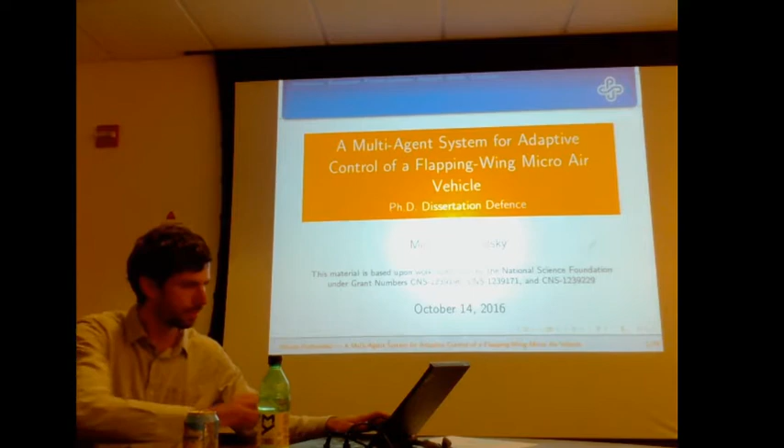Did you bring your papers? What papers? You said you published some papers, you didn't bring them? I can print them really quick. Yeah, you should do that, print a set. Might as well. Can you print the overheads as well? Don't you have a copy? No. You didn't print out copies of the overheads? I made two copies. Oh, there he is. Sorry about that.

I'm not as fast getting across campus as I used to be.

Okay, let me email it back. Is this the latest? No, it's an earlier edition from six months ago. I don't know if it's the same as before. This is the older version. Okay, this is for you. Thank you, I had two copies of the thesis. So let me print some more. Do you want a copy of these? Is there an extra copy? I don't need it if it's the only copy, I can just follow along. Okay, I'll make notes on the document.

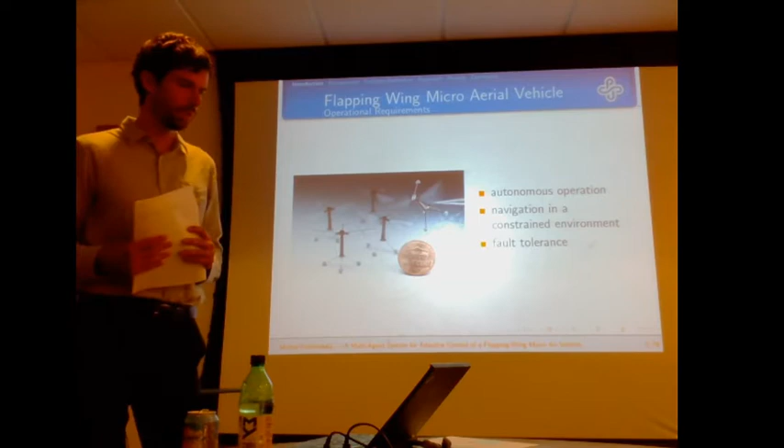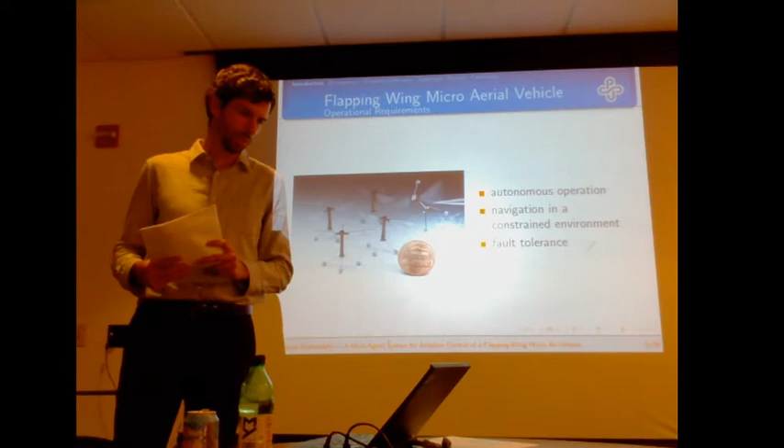If we want to apply these kinds of small robots in practice, there are some requirements. First, we want autonomous operation, meaning there's no pilot behind each robot, because that would be infeasible if you start swarming or have some kind of massive application where you want these robots to work functionally by themselves. Another property is navigation in constrained environments, because we want them to operate indoors in some kind of cluttered environment. So this is an important feature.

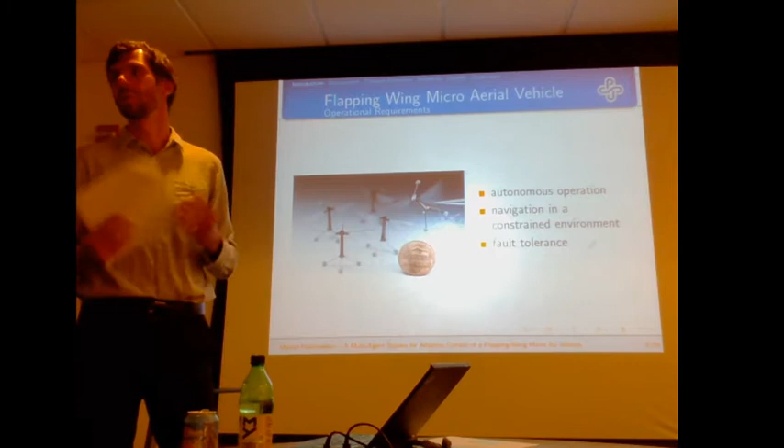We also require fault tolerance, because in case there's damage to a wing or some other problem, we need this vehicle to be able to recover and continue its mission.

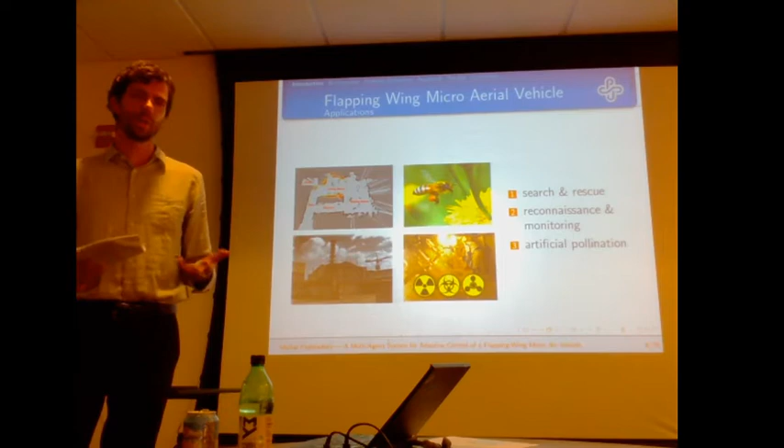So what are the applications? First of all, search and rescue in case of some kind of environmental disaster. First responders arrive to the facility, like a chemical plant, and they want to send these vehicles inside a building to see the status of the building. Is it stable? Is it safe to go in? Are there any toxic materials present? All of this can happen automatically without anybody stepping in and being potentially in a dangerous situation.

Another situation is firemen, similar story. If you have a building on fire, you can send these robots in and assess what's going on inside without putting people at risk. Another big area is reconnaissance and monitoring.

First, in a military situation, you want to see with this robot what's going on around you, where the enemy is, what kind of situation is going on there. Then for monitoring, that's typically for law enforcement. You want to see behind the door what the suspect is doing, and so on.

Those two are fairly not surprising, but the last one I want to mention is artificial pollination. The idea here is, if for some reason we're in a situation where we need more pollinators for our crops, and there's no bees or other ways to do that, we could use these tiny robots potentially to pollinate the plants.

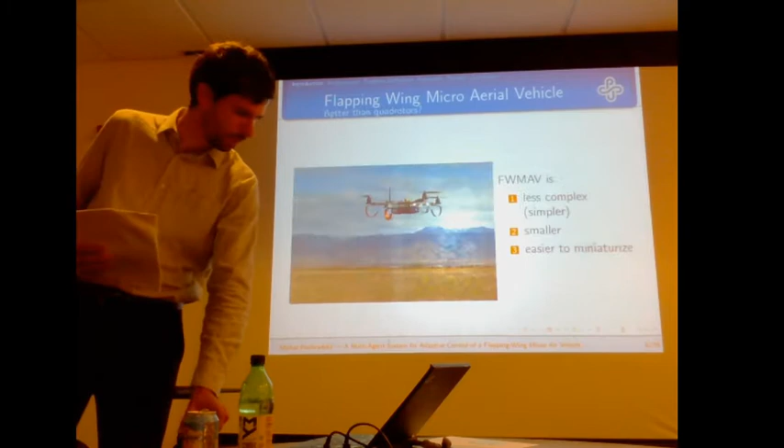You might ask why we don't just use quadcopters or some other drone for the same thing. The problem is you can only go so small with quadcopter technology, because you need motors and propellers, and that stuff just doesn't scale well after a certain point. The aerodynamics doesn't work the same way, and the motors cannot be much smaller than they are. So if you want to go truly insect size and operate on that small scale, you have to use flapping wing vehicles. There's really no way to make a quadcopter that small.

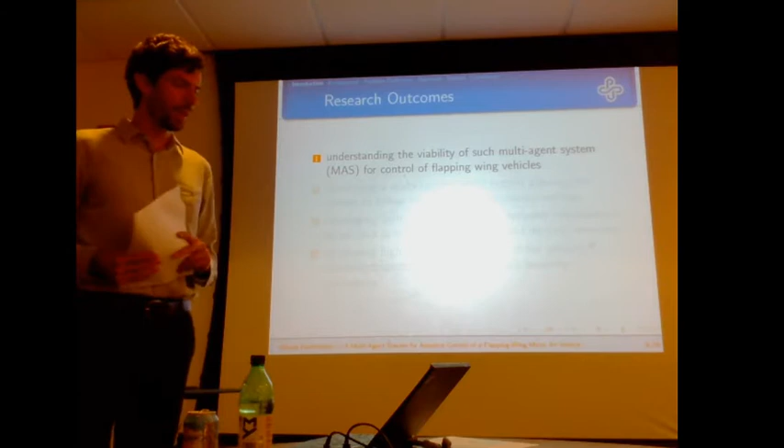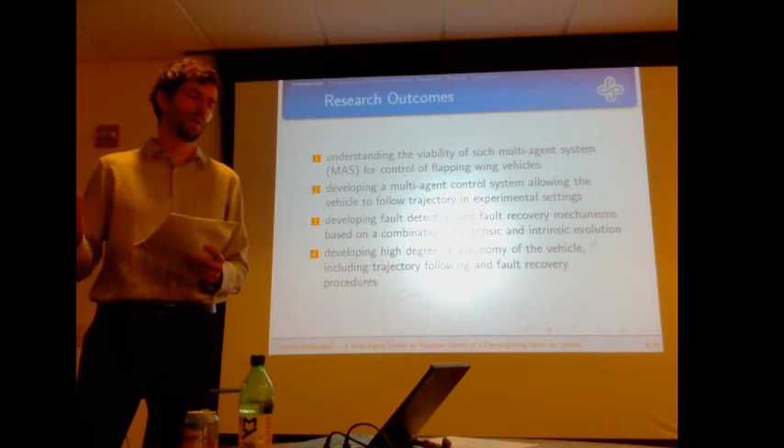I would like to briefly mention the expected research outcomes. First, we need to understand if a multi-agent system is a good option for the control of such a vehicle. Then we need to develop this multi-agent system, and because we want the vehicle to be autonomous, we want it to be able to follow a trajectory we specify. Then we develop a fault detection and fault recovery mechanism, adding this property of fault tolerance. The overarching goal is to develop a vehicle that is autonomous, can follow the trajectory, and can recover from a fault.

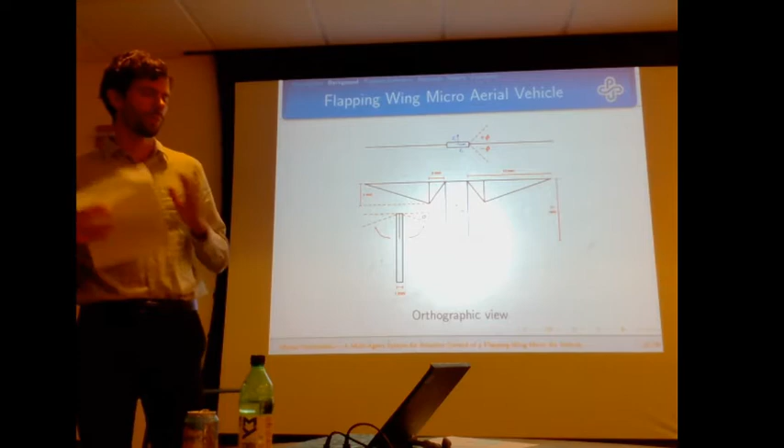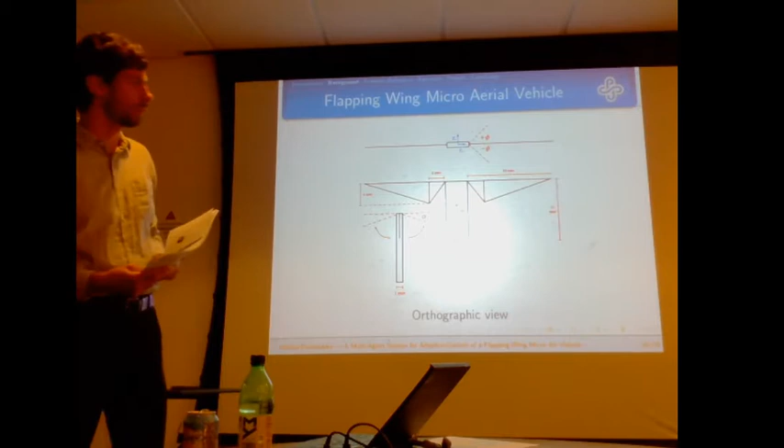Now some background information. Some of it may be familiar to you, some may be new, so I'll go through it briefly. This is a model of the vehicle. You can see we have two wings. They can move a certain angle back and forth, and they have some angle of attack alpha. Basically they're like on a hinge, and the wing is loosely on the hinge, moving forward until it stops at the angle alpha, then it moves backwards and stops the same way, just in the opposite direction. So this is like a conceptual vehicle.

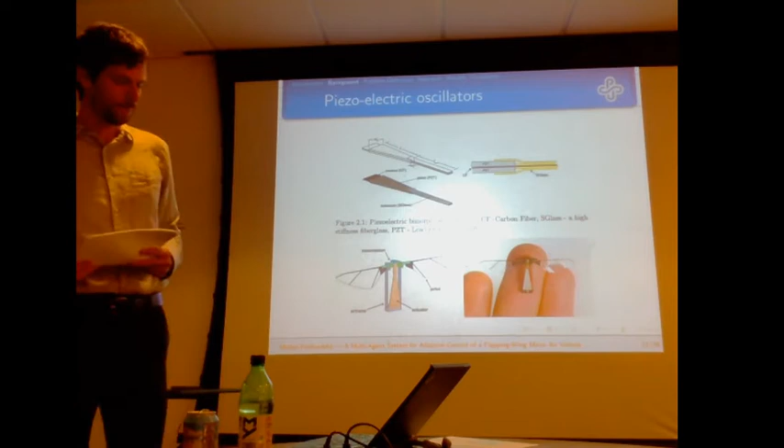Now I have to talk a little bit about what kind of actuators I can use for such a robot. The first one is called a piezoelectric oscillator. It's basically two slices of piezoelectric material, and when I apply voltage across them, it will bend either one way or the other depending on positive or negative voltage. In this picture, here we have the vehicle, this is the actuator, and it's extended and connected to a transmission that then translates the bending movement to flapping of the wings. You can see that it can be achieved to be truly insect size.

Can I ask you, where do you apply the voltage in that device? So you see tiny wires here, and basically there are two layers of this piezoelectric material, so you apply, let's say, positive here, negative here, or the other way around, just down the bottom of that structure. Oh yeah, I think this is where you apply it, this is like where it connects to.

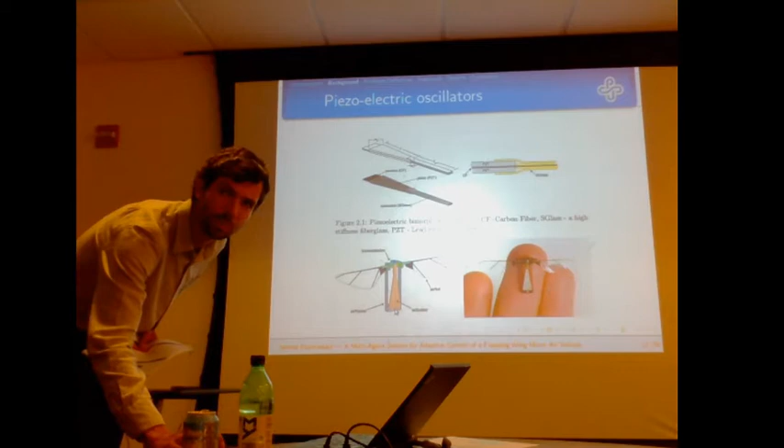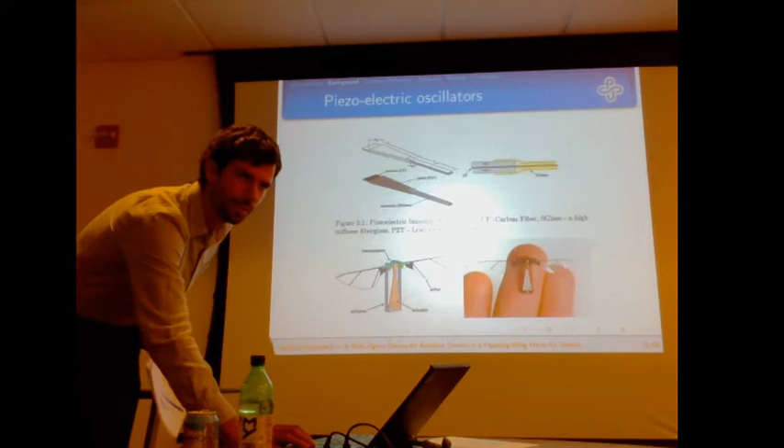What kind of battery for this? So right now this vehicle is externally powered, and I'll get in a second to why.

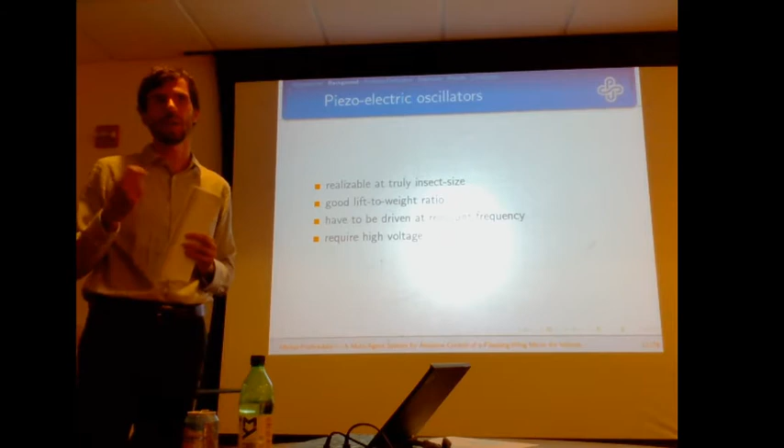The reason is you need relatively high voltage, at least 150 volts. So right now it's only externally powered, but it has a good lift to weight ratio, so you can actually achieve free flight, and it allows you to go really insect sized. The problem, besides the power requirements, is that it has to be driven at resonant frequency because of the inertia of the wings. So in short, if you want this to truly work and provide sufficient lift, you're constrained to a specific frequency, so as a designer you don't have much play in this sense.

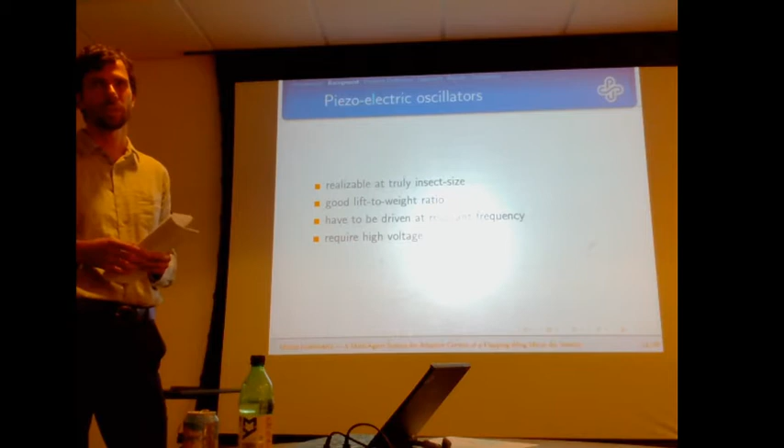Another disadvantage is that these oscillators are only available if you're at Harvard Microrobotics Lab. If you're not, then it's really hard to get these. So it's basically an AC waveform.

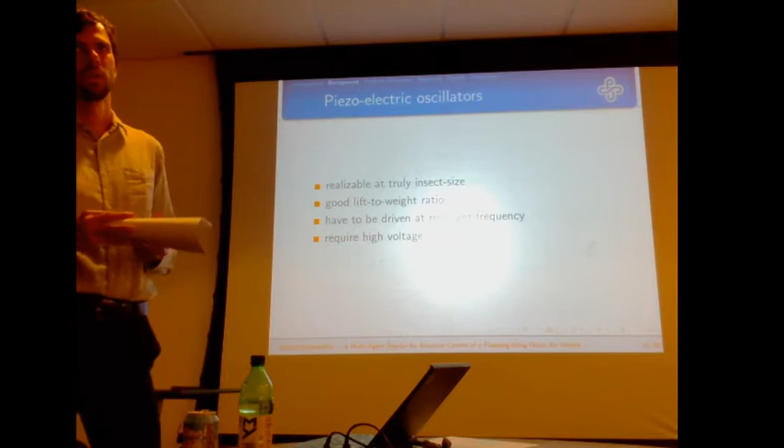Is it sinusoidal? Yes, it's a sinusoid, purely sinusoidal. And is the model of this device basically a capacitor? Because there's really only an AC current flowing through it. Honestly, I'm not sure, I don't think you necessarily need a model like that. Well, it must act as one of these basic elements - sure, yeah, I guess capacitor would be reasonable.

Yeah, and you can feed it with a sinusoid, and then you can do phase shift or offset the voltage to get it to do different things.

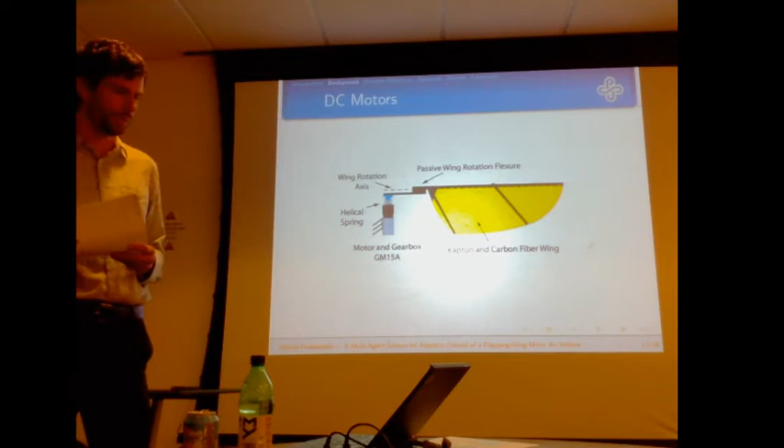So if you happen to not be at MIT, you essentially have to use DC motors for these vehicles. The typical scheme here is we have a motor with a gearbox with planetary gears to provide sufficient reduction, so we have enough torque at the output shaft. Then we have some kind of transmission or linkage going from the output of the motor to the wings, to translate the rotational motion into flapping motion.

And the wings themselves are made from carbon fiber spars, and then we have some kind of either Kapton or a different thin plastic foil as the main part of the wing.

Here you can see this is a robot. Here are the motors, and again there's a transmission on top of it, and then here's the shaft, connected with linkages to the wing. So as the motor rotates, it makes the wing move back and forth.

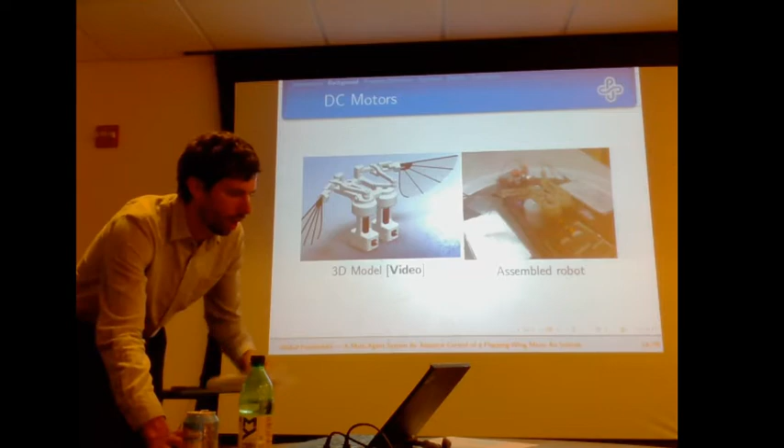And I have a video to show this, so let's see how this will go. Yes, so this is when it's operating, this is basically when the robot is in action. And then the assembled robot is here.

So DC motors are comparatively affordable and easy to use. They don't produce as much lift, so you're restricted in how small and how light you can go. But the majority of the vehicles currently available, or currently developed, use DC motors.

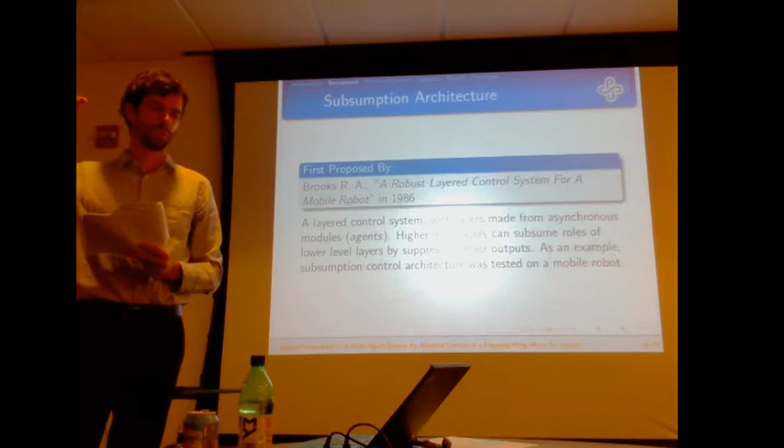So then subsumption architecture - it's an important part of our solution. Just briefly, it's a concept widely used in robotics, where you can decompose the behavior into several layers with different priorities. Every higher layer has a higher priority, and if it needs to, it can take over the lower layers.

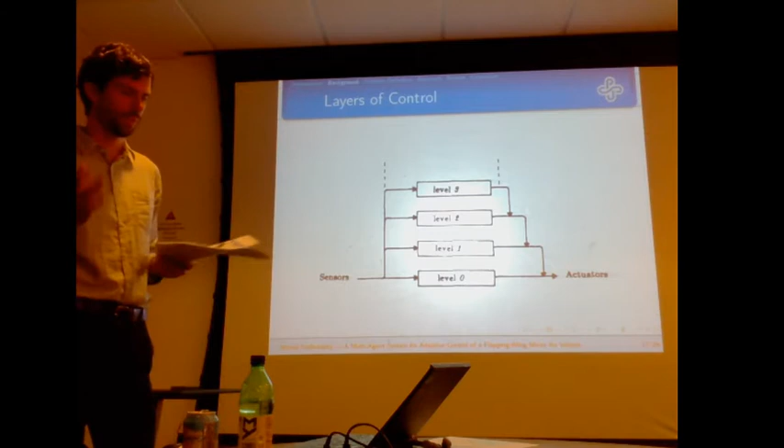So as a short example, here I have inputs from the sensors, then different levels of behaviors, and then actuators. Level 0 is, for example for a ground robot, level 0 will be just 'go straight' - a simple behavior, if nothing else just go straight. Then I have level 1 behavior, which says if you find an obstacle, turn right to avoid it, because I don't want the robot to hit the wall.

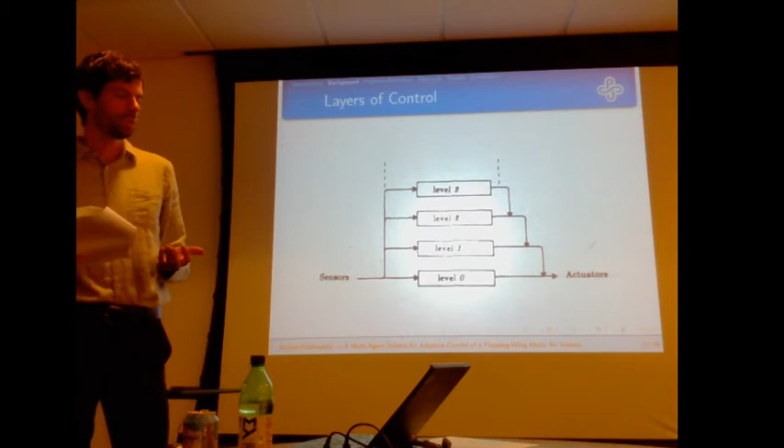And then I have level 2, which is if low voltage on the battery, stop. So basically the robot will go straight until it gets close to the wall, and it will turn right, and continue doing so until it runs low on battery. The idea is that you can compose relatively sophisticated behavior with these very simple components, because you can easily extend it to, for example, 'if something happens, return to the base', or 'if you identify some kind of target, do something'. So it allows you to easily build up complex behavior.

As an example, it was used in the Roomba robot, which is based on subsumption architecture. They also used subsumption architecture on a Mars rover to a certain extent. So it's a fairly common theme.

Then just briefly about evolutionary algorithms, again inspired by nature. In short, what I'm trying to do is have some population of individuals, and each of them represents some solution.

I assign them fitness based on some function, and then I let them compete with each other and produce offspring, and only the most fit will propagate in time, and then hopefully I'm getting the fittest at the end. So I might not get the optimal solution, but I get some reasonably good solution.

So far everything clear? You missed the definition for extrinsic and intrinsic. Okay, so extrinsic means that in case of a robot, the extrinsic evolution runs on some kind of model. I define a model, and then I run the evolutionary algorithm, but the fitness is assigned based on this model.

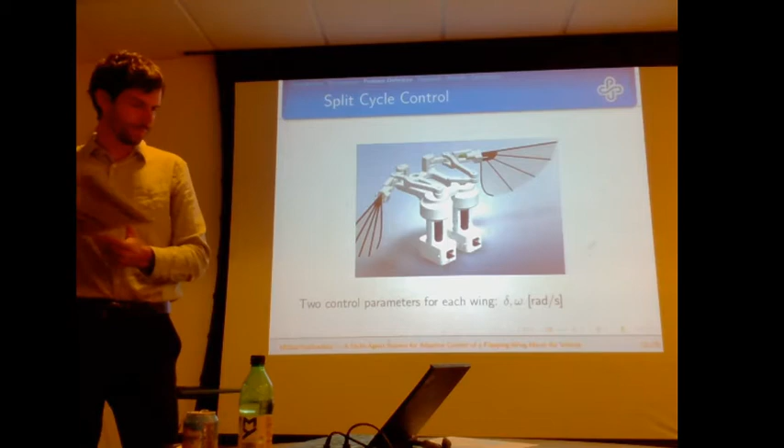But if you happen to go fast and then slow on the downstroke, you generate more force in one direction than the other, and it creates momentum that turns the vehicle around. That's a simple idea.

So then what I can do is, this is just a formal definition of the same, because I describe my wing motion as a cosine function, and delta is just a frequency shift, essentially a phase shift. So I'm moving it a little bit before or after the actual symmetrical movement.

I will use this concept for controlling the vehicle, because if I want to turn around, I have to do upstroke faster than downstroke, and then vice versa for turning the other direction. I'll get to that more later.

Now I want to show the experimental setup a little bit. For our experiments, we locked the vehicle to 3 degrees of freedom, which means we put it on a 2-dimensional surface, on a water surface, and then the vehicle can rotate around its own axis.

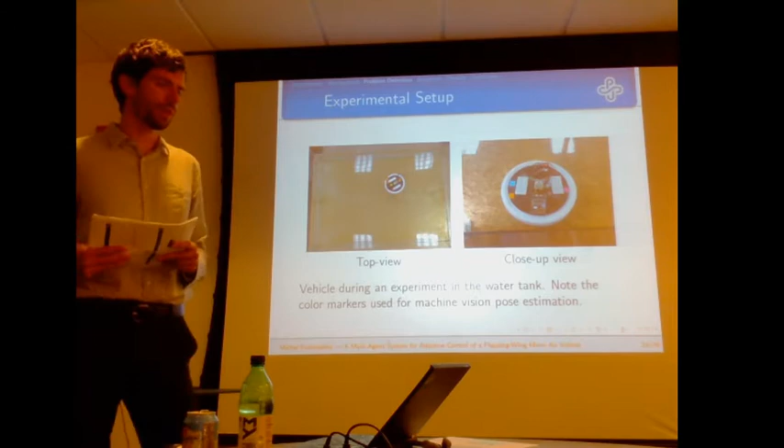The reason for this is twofold. First is to have a proof of concept that our solution works, that the algorithm works, and that the multi-agent system can perform well. The second is the limitation of the hardware, that currently the hardware doesn't produce enough lift to actually take off. So we were locked to this 3 degrees of freedom test plan.

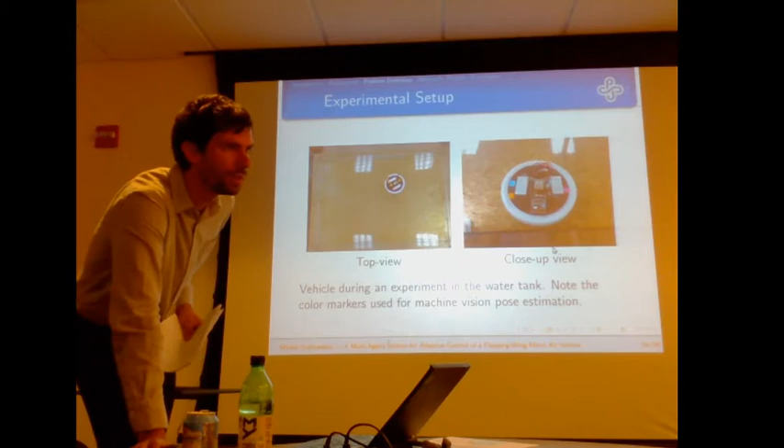Just as a comment, that water tank in the NEAR lab, which is used to do underwater sound testing, you have to have a large water tank, and that's where we got that water tank from.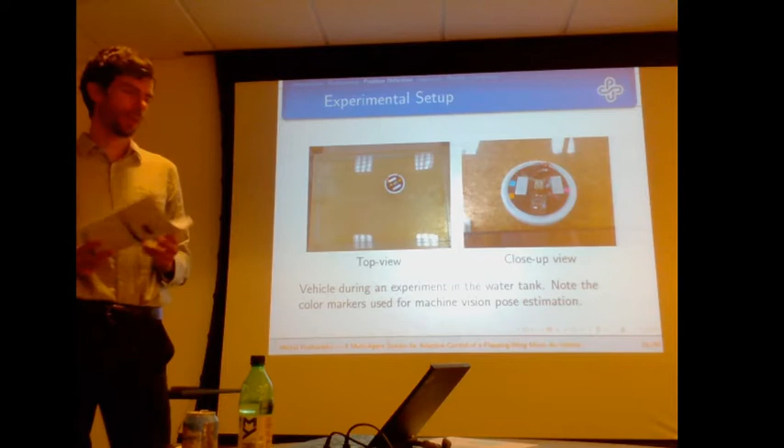So the thing is, it's about half the size of this table, so it's a fairly good size water tank, and we would just fill it up and let it float on the surface of the water. They were nice enough to let us use it, so that was good.

We put a camera on top, which you can see here on the left top view. How far was the camera? Around—it was actually on the ceiling, so 1.5 meters from the top.

Imagine this is the water, so then it was on the ceiling. How big were the color markers? Like 1 centimeter, like this, or like this. So then we had 3 markers, so you can determine the position and orientation of the robot. And you can see on the right, this is a close-up view.

And I happen to have a video that should present better the experimental setup, so let's see. And you will tell us what software you use to find the color markers? Yeah, I'm using OpenCV.

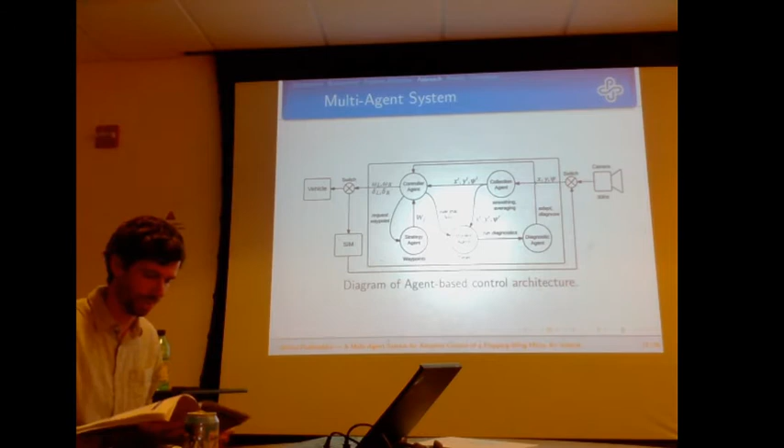So here you can see we have the camera that's above the water tank. And the camera provides, after we parse the images, XY coordinates and orientation. I would just refer to it as a pose, because position and orientation make up the pose of the robot.

Then we have a collection agent, and the collection agent basically filters the output from the camera, does some averaging and smoothing, and then sends the pose estimate to the controller agent.

The controller agent has the subsumption architecture in it and determines what kind of control inputs, delta and omega, it sends to the vehicle. The control agent also checks if it arrived at a waypoint yet, and if it did, it requests a new waypoint from the strategy agent that provides the new waypoint to go to.

Then I have a monitor agent that monitors the behavior of the vehicle, and if there's a suspicion of poor performance, it requests the diagnostic agent to run diagnostics.

So this is everything on your laptop, right? And then the laptop sends some signals to your vehicle, right? Yeah, but without loss of generalization, you can run the same code on the computer or on the actual robot. Can you? Yes, it's not computationally intense. But vision must be on your laptop. Yes, vision is on the laptop. Okay, and the motivation is that in the future I would have some other sensors on the robot that can determine the position and orientation, but I probably wouldn't use the camera in that case.

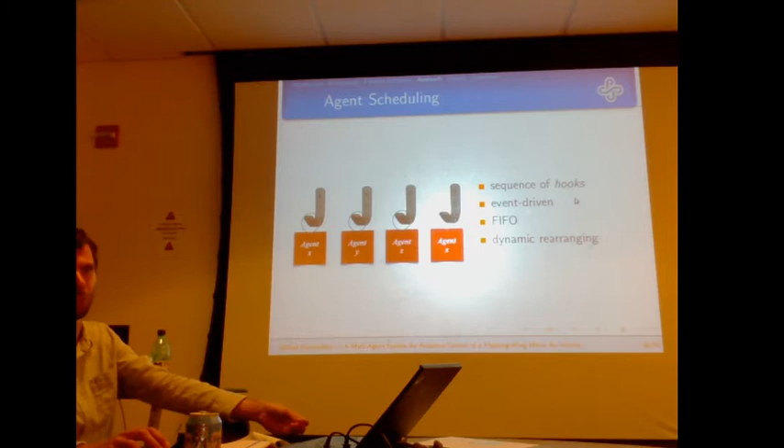And then the diagnostic agent runs the diagnostics and determines if a fault happened, and if it did, it takes certain actions. So now, just briefly about scheduling, the whole system is event-driven, so I don't have a set timer or frequency for running these agents. It's purely based on the events that happen. An event can be a new pose estimate becoming available, or the robot achieving a waypoint. And then I can dynamically rearrange the agents and step them in a sequence.

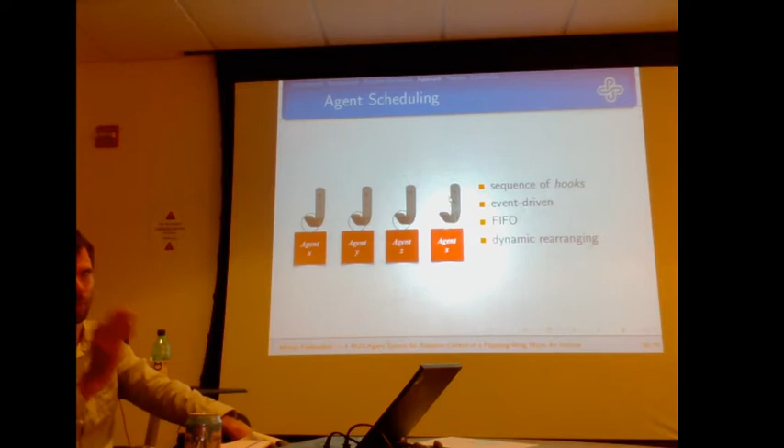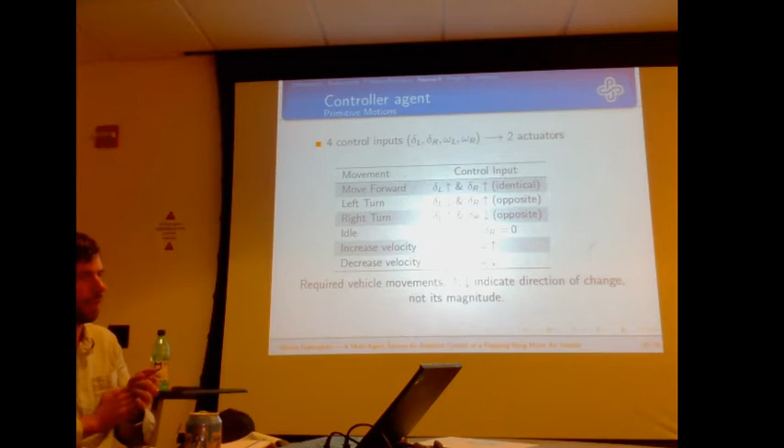So the control agent, we have 2 actuators and 4 control inputs. Because we have 2 actuators and 3 degrees of freedom, it's an under-actuated vehicle, which makes it a more complicated control problem. Hence I have delta and omega for each of the wings. I have these 4 primitive motions I can achieve with this vehicle: moving forward, turning left, turning right, and doing nothing.

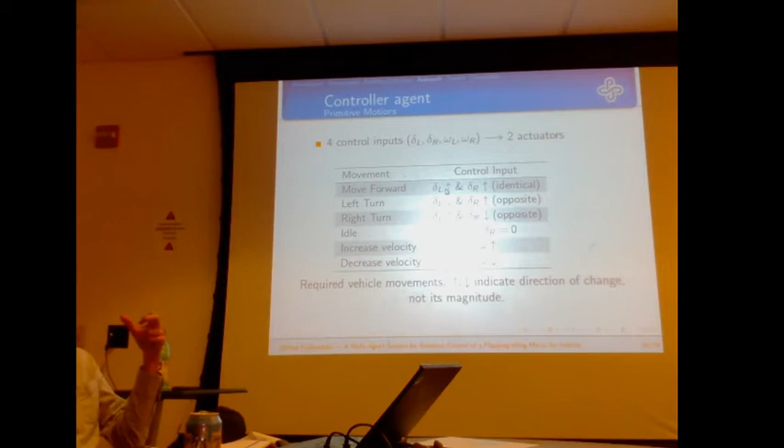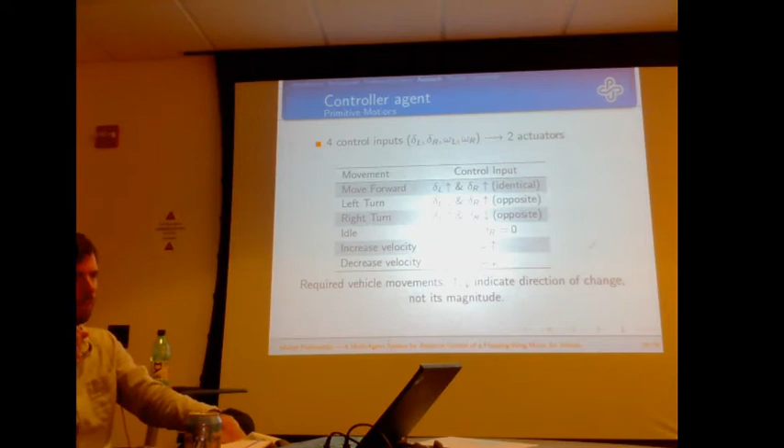If I want to move forward, I have to have the symmetric delta shift in both wings. I produce the force in the same direction, and I just go forward. If I want to turn, I have to do it in the opposite way, so it turns around its own axis. At this point, I know the direction, but I don't know the exact value of the delta or the omega, because that depends on the individual robot and can vary between them. So I will need some kind of learning algorithm to determine these numbers. Also, the faster frequency means I'm performing the move faster, generating more force, but the wing beating frequency itself doesn't change the direction.

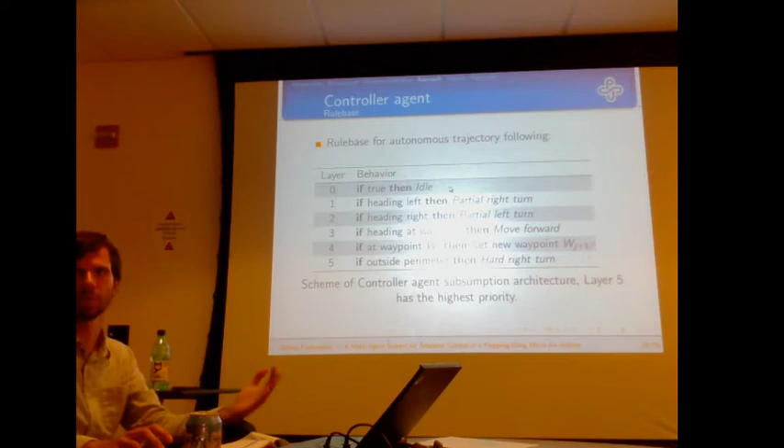This is the rule base for the subsumption architecture. Basically, the higher number the layer has, the higher priority it has. So in this simple case, if true, then idle, just do nothing. But then I have this set of rules: if heading left from my desired direction, you want to turn right. If you're heading too much right, you want to turn left. And if you're heading straight at a waypoint, then move forward to get closer to the waypoint.

And who gives waypoints? They are on a pre-computed list. The strategy agent has a list of waypoints fixed at compilation time, so it's not adapted. Then if I reach a waypoint, I want to get a new waypoint. And if I'm outside a certain perimeter, I want to turn right to avoid going even further.

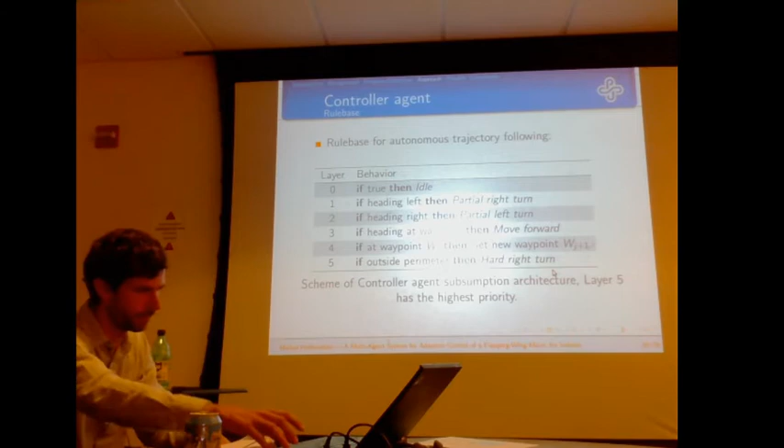Can I ask, on the controller agent, is it a straightforward generalization to 6 degrees of freedom? Here you're just doing 3 degrees. Oh yeah, so this is for the 3 degrees of freedom case. Is it pretty easy to generalize to 6? Yeah, I have a point about it later, that it can be generalized.

So the monitor agent monitors the performance of the vehicle, and basically the idea here is I have some expected behavior. Let's say I know if you turn, it should take a certain time, and if it doesn't, or if it takes longer than expected, then you should start diagnostics.

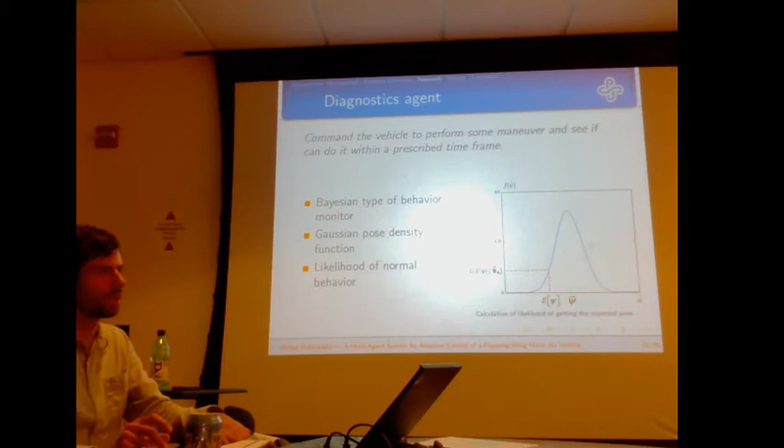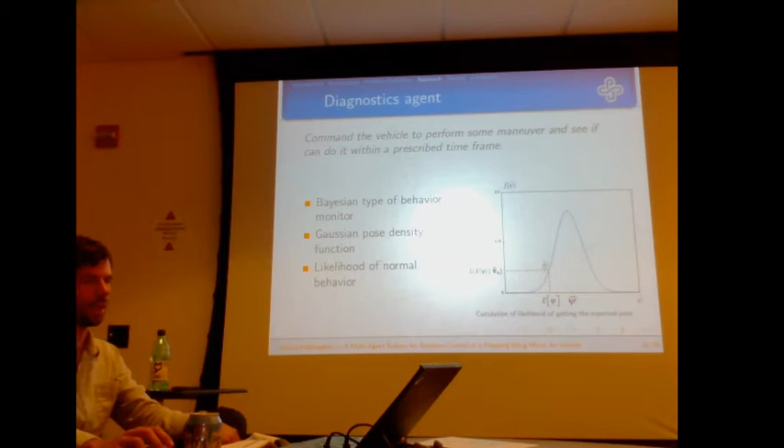This is applied for the diagnostics agent, where, as I said, I know if I tell the vehicle to do a certain maneuver, let's say turn around, I know how much this normally takes, and if it takes significantly longer, or takes significantly shorter, then I know that something's wrong and I have to take action. The idea is I have a normal distribution of times it takes to perform the maneuver, and I accept a range of about one standard deviation on each side. If I'm past that point, I can tell that most likely I'm not in a good operating condition. There's some fault, and this will get more clear with actual numbers. I will revisit the idea later with actual measurements, so it makes more sense.

As I mentioned, because we don't know a priori what control parameters we need to use, I need some kind of initial learning. That's where I use evolution algorithms to learn for each vehicle, because each robot is different due to manufacturing differences, nonlinearities, and so on. So before I can go and fly, I need to know these control values. Then in flight, if a fault happens, I want to be able to update these control values to restore certain functionality. So you're using evolution strategy, right? You're not using crossover? I'm using evolution strategy, yeah.

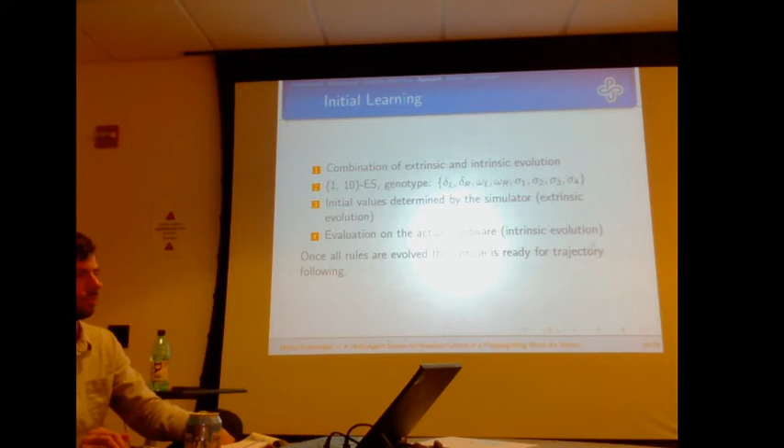So for the initial learning, I'm using extrinsic and intrinsic evolution — I'll explain it later — and I'm using evolution strategy. For the initial values, I use extrinsic evolution to evaluate that my algorithm works, and then I use intrinsic evolution on the actual hardware to get the numbers specific for the given robot. Once all these numbers are evolved, I can start with the trajectory following.

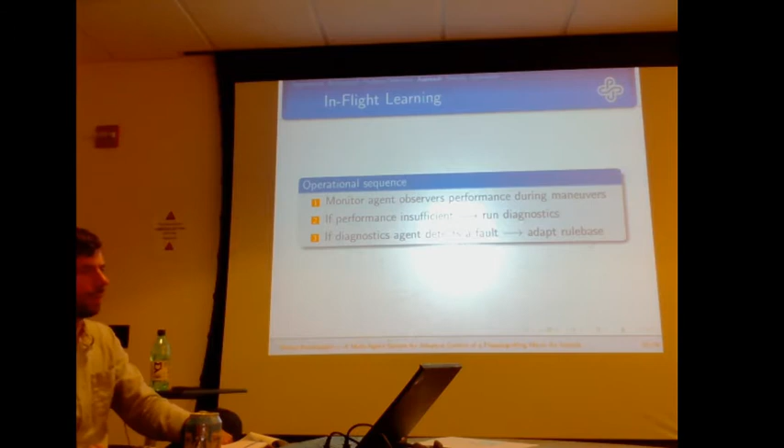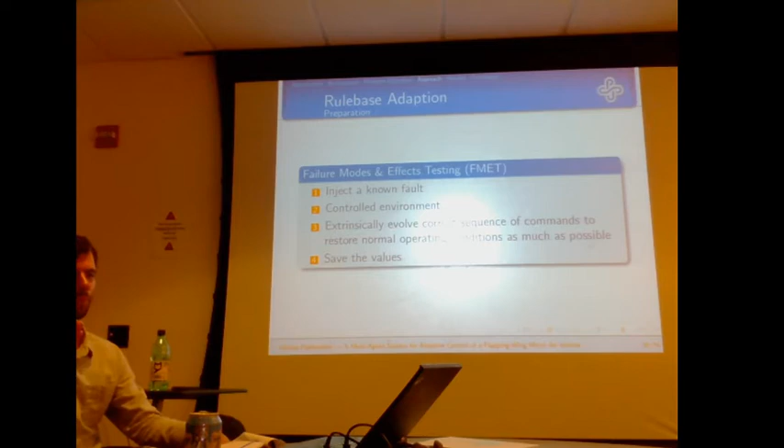So again, this is for the in-flight learning. If I do a specific movement and the performance is not sufficient, I run the diagnostics, and if I see that my likelihood function triggers a fault, I will need to adapt the rule base. The way this works, I know in advance what kind of faults I can recover from. Let's say if my battery is dead, there's not much I can do.

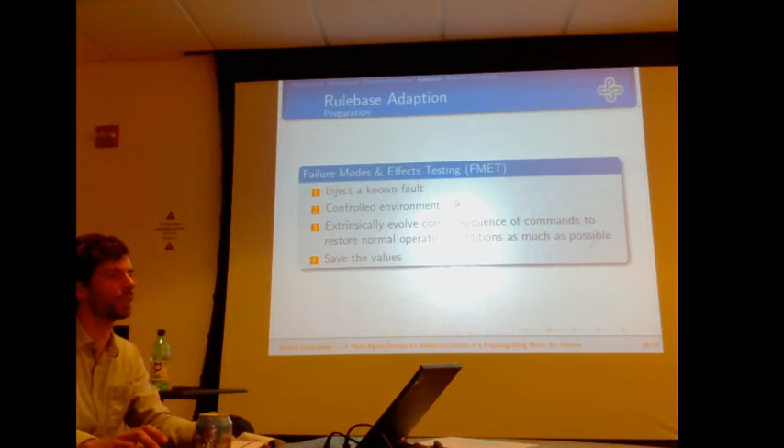But if I have, for example, a damaged wing, then I can recover from that up to a point. So you have fixed rules that I know how to adapt based on the kind of faults I can recover from. And the assumption is I have only one fault happening at a time. First, I need to inject this fault I'm trying to recover from. I do it in an experiment in a controlled environment, and then I measure the response, and then I evolve the new control parameters so I can restore the performance.

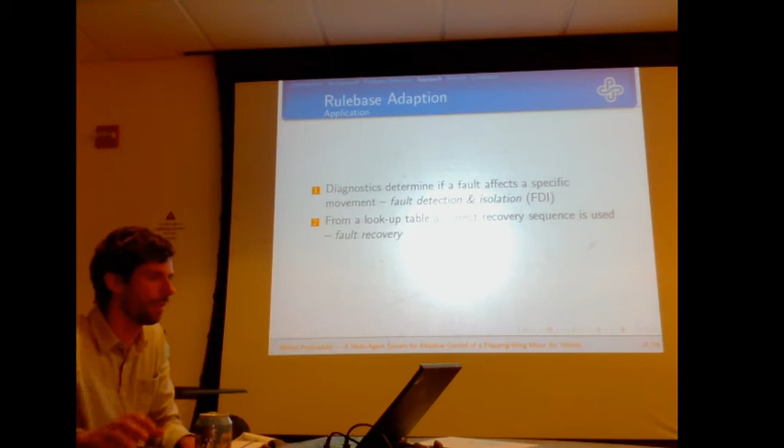Again, this will become more clear with an actual example. And this is just once over the same - if I have a specific fault that happened, I can adapt the rule base and then recover from the fault. So now the results. I will go over initial learning, waypoint following, fault detection and recovery, and obstacle avoidance.

So for the initial learning, I needed to verify that the evolution strategy is a good choice for the learning algorithm. And because I had access to a simulator developed by a third party, but the simulator was for a different vehicle than ours, the values that we would learn from the simulator were not very applicable for our case.

So I instead made this very simple fitness function that basically says the fitness is proportional - the higher the fitness is, the shorter time it takes to finish the movement, and the movement will be finished faster if I produced more lift. So that can translate directly to: the higher omega is, the higher wing beating frequency, and the higher the delta shift is, then I get more stronger control action. And that's basically what I'm looking for, because that will translate into a shorter time.

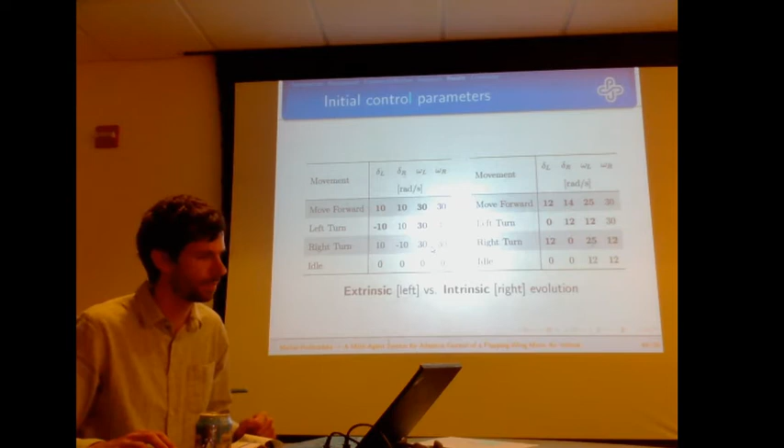I used the best solution that I got from all these like 100 runs. I did all these runs and got the best solution, and you can see that whenever I reach 600, that basically represents my optimal solution, like a global optimum. So yes, arguably it's not very precise because the model was very simple. The fitness function was kind of very simplistic, but my intention was to see if I can get good results within the given time frame. So I was intentionally making a simple model, because then I would use the intrinsic evolution to test the actual robot and get the relevant numbers.

So from the intrinsic evolution, it turned out that it's better to turn only using one wing instead of two at the same time. And for going forward, I had a different setup for the delta shift and for the omega. These are the values I used in the next slides.

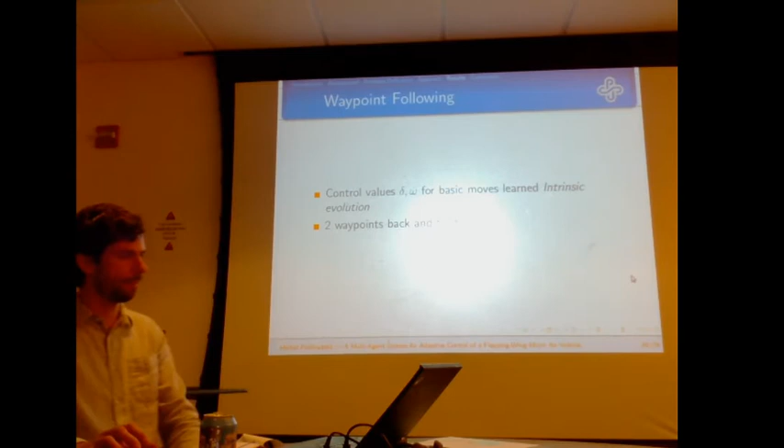So for waypoint following, I have two control values, and I set up two waypoints, and I will go back and forth between them to see how well the robot will do. So here, the blue is the waypoint I'm going to, the green dot is the robot itself, and I'm starting here. I started with the robot facing forward and the waypoint being behind it, to make it kind of harder, so the robot had to turn around and then go towards this waypoint.

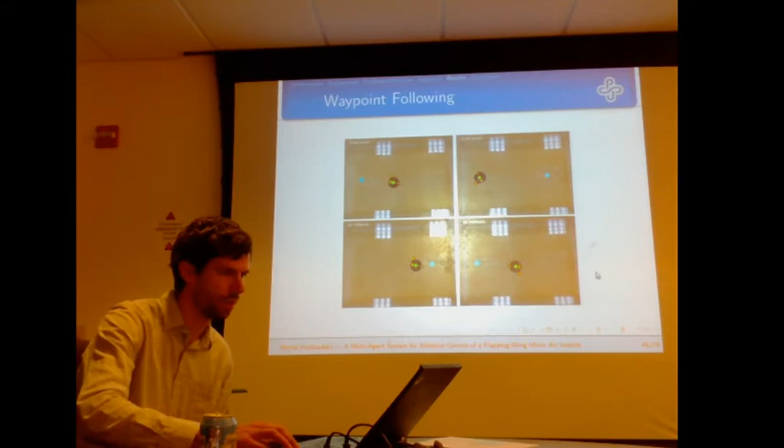As a side note, this is like a second generation. The first generation was even bigger and slower than this one, so I had to do some improvements to make it faster, but it's still... this is it.

Is the flapping so different because one of those wings is trimmed on this one? No, these are the same wings. I suspect it's just the frame rate of the camera, and they have different frequencies, and then you speed it up, so it makes all these effects. In fact, the right wing is now moving faster, except it's just... yeah, it's like if you're looking at propellers on a video. Yeah, it's precession. So similar.

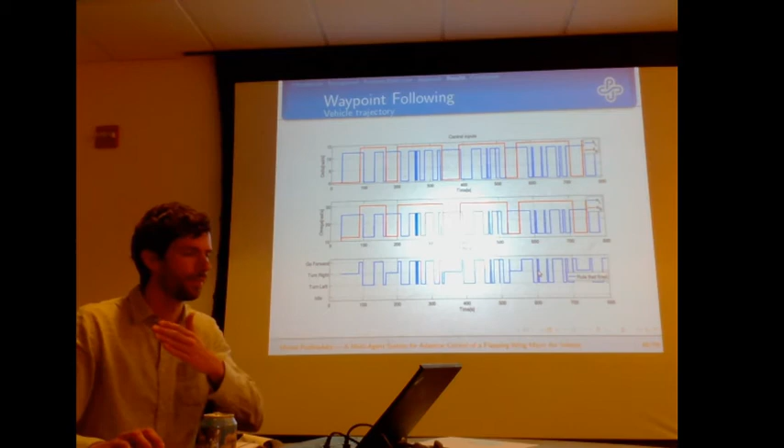So just a summary for this, I would say the waypoint following is reasonably good for our application, and we can easily extend it to multiple waypoints. You can basically make an arbitrary trajectory just by adding waypoints. I wasn't addressing the problem of trajectory generation or path planning - that would be a different story. But we definitely can follow the waypoints, just go from A to B between those two waypoints. It takes around 5 minutes, just to get some insight into how long the whole experiment takes.

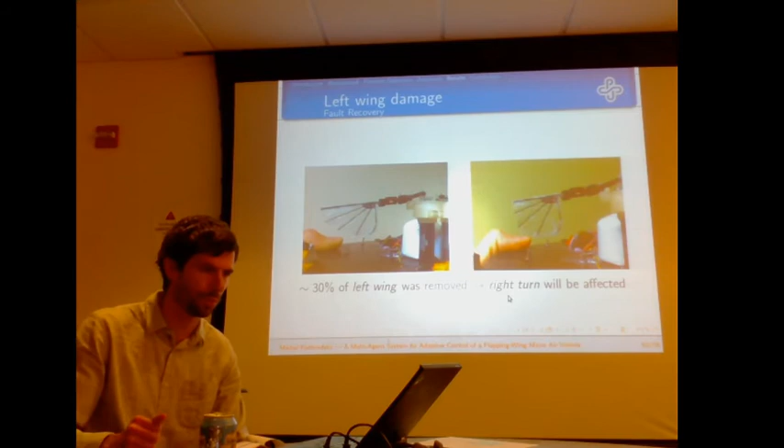So I did left wing damage - I cut off a little bit of the left wing, and the assumption is the right turn will be most affected, as well as going forward, but the right turn will be most obvious, because the left wing basically does all the work when you're turning right. So if the wing is damaged, then I will notice it.

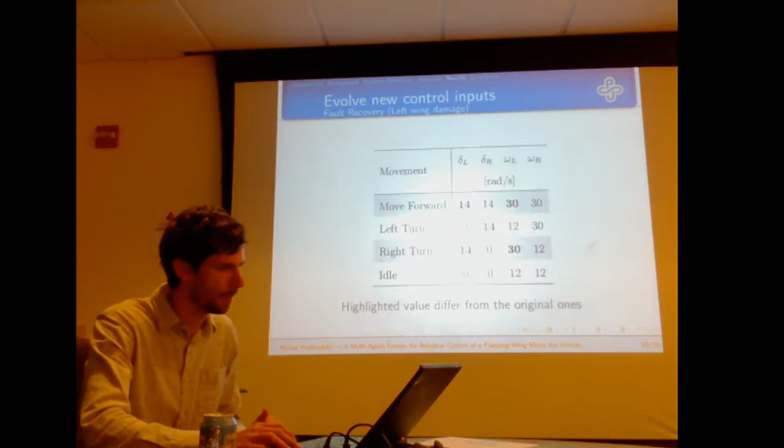So what I did is run again the intrinsic evolution with the damaged robot, and I was able to get new values for right turn, even left turn, and move forward. These are updated - you can notice before this was 25, now it's 30, and that's the hardware limitation.

This is from intrinsic or extrinsic? This is intrinsic. This is on the actual hardware.

And so here the idea for diagnostics is after startup, I initiate turning right, I measure the time, and if it's more than some Tmax that I determine based on my data, then I have a fault present. In this case, it's the left wing damaged, and I need to upload my control inputs.

So on the left is a histogram of my turn right times I measured with the original robot. You can see average was around 77 seconds to turn around, and I fitted a normal distribution over it, so what I chose was to do one sigma interval on each side, which goes from around 61 to around 94 seconds - the 68% confidence that this is good behavior. So basically I said if the turn takes more than 94 seconds, I consider it faulty because it's beyond my confidence margin.

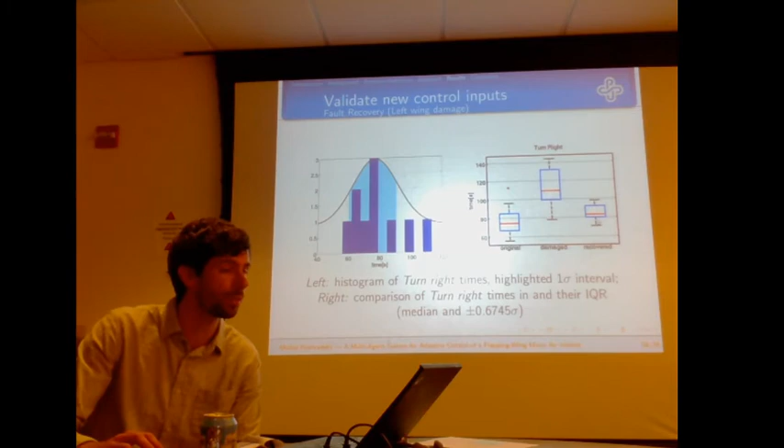And then after I recovered using the newly evolved control inputs, I'm getting back, or closer, to reasonably close to the original performance. Any questions about this?

All right, so just to show you a quick video here. What happens here is after I initialize, I say turn around, and I measure the time it takes, as I mentioned. Once this happens, I will do all the comparison and calculation and update of the control values, and then I will follow - because now it already detected a fault, recovered from a fault, and is moving towards a waypoint.

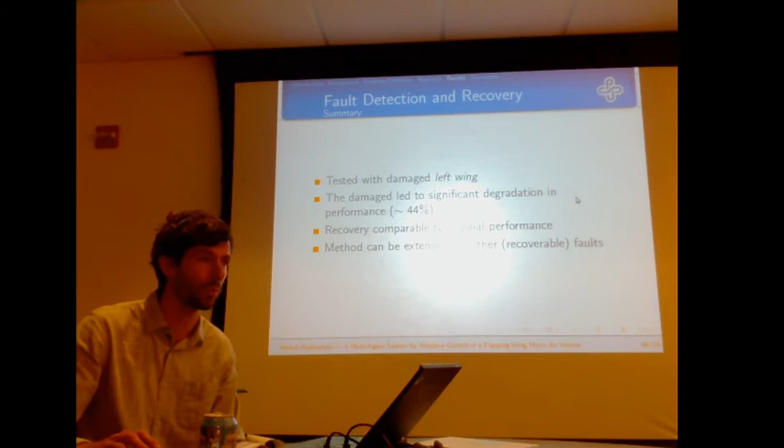And the last thing, just really quick, obstacle avoidance. Basically what happened during experiments is that often the vehicle just goes to the wall. It turned out that simple turn right doesn't prevent it, because the robot has momentum, so if you just turn right, it still has momentum and moves forward. So one way to avoid that would be to restrict the area and say don't go beyond some boundary within the water tank.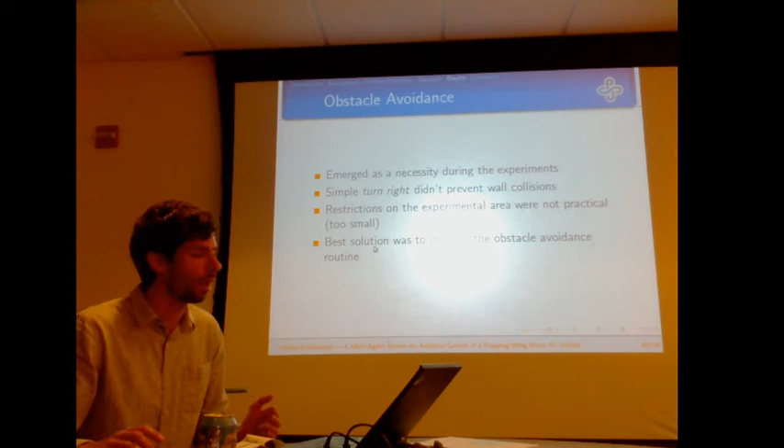That would be impractical because it's already at the limit. It would be nice to have an even bigger water tank to do more maneuvers, but we didn't have that. So what I decided was to improve the obstacle avoidance routine to be able to anticipate the wall, the collision, and avoid that.

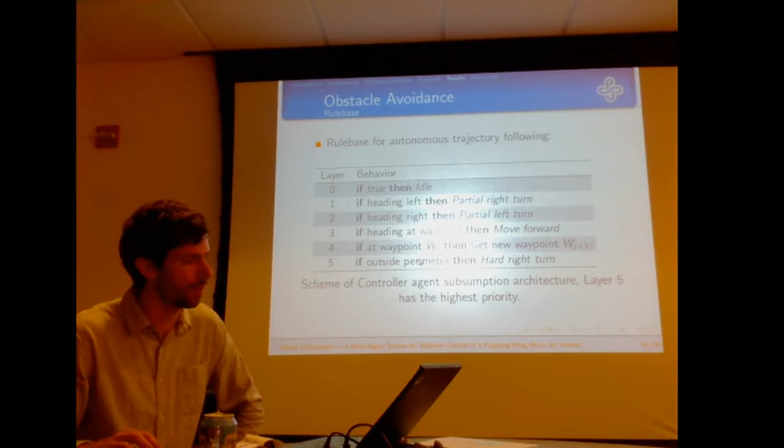So this is the original rule base. Here it says if outside perimeter, hard turn right. That didn't work so well. Instead, I'm saying if obstacle ahead, then avoid the obstacle. Let's say the obstacle would be some kind of virtual wall in the middle of the water tank.

This is the algorithm. I'll skip it for time reasons, but I can get to it later. The idea is I have an obstacle I know about, and I'm able to move around the obstacle and still reach the waypoint I desire.

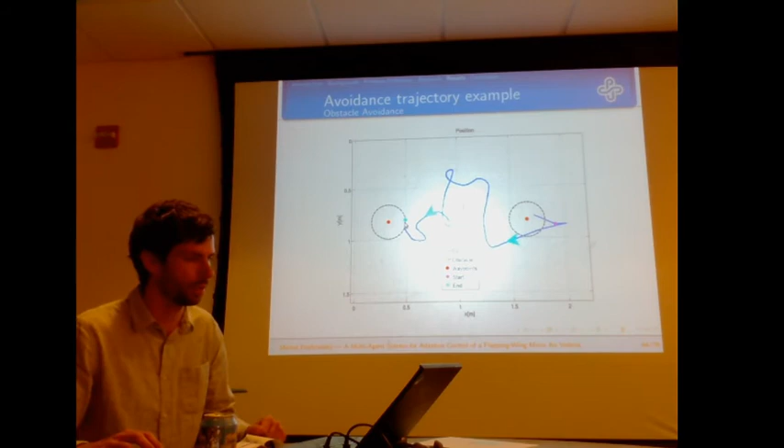Just a quick video to show this. I start from the beginning. It sees the obstacle - I'm not dealing with the problem of detection, I just assume the robot knows where the obstacle is. It uses intermediate waypoints. Basically, I know the line between my original waypoints, and I move these intermediate waypoints around the obstacle until I'm sufficiently...

It knows the obstacle - the camera sends it the XY coordinates and orientation, right? Yes, I know it from the camera. The robot itself can calculate its relative position, but all information comes from the camera.

So then it turns around and follows to the waypoint. As I said, obstacle detection is a separate problem - I just assume I know where the obstacle is now.

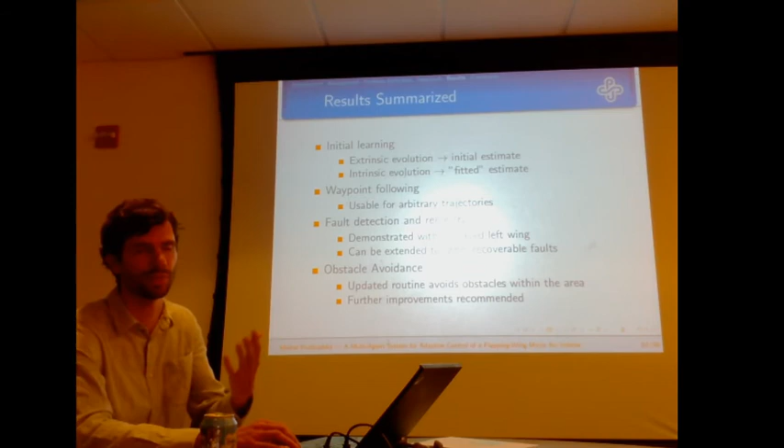So just to summarize: initial learning to get the control parameters before we can perform any other experiment. Waypoint following - we can use arbitrary trajectories, basically any number of waypoints. Fault detection and recovery demonstrated with one wing damaged. Obstacle avoidance - we can avoid an obstacle within the area, but it would be good to have further improvements to avoid the walls and so on.

So any questions before I go to conclusion?

One question, I guess I missed it - with the controller for when it has no fault, you didn't do adaptive control where it switches over to the fault controller, did it?

The adaptation here happens in the fact that I'm switching the control values I have associated with each movement. I have these four basic movements, and for each individual fault, I use an updated value representing different omega and delta for a given movement.

But it wasn't like in the beginning where you showed the layered control architecture - it wasn't like that, where one of the layers is a fault handler that detects it? No, so the subsumption layers were for determining where to go, but I have a separate agent that handles this fault behavior. Oh okay, so the subsumption architecture itself would not be changed by a fault. Got it, okay.

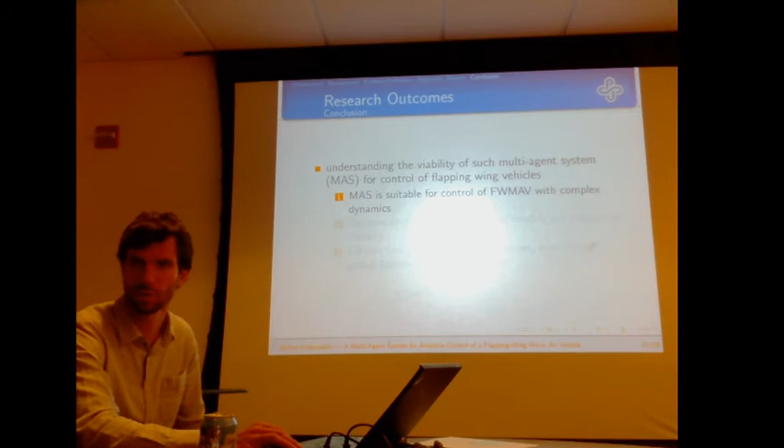So these are the research outcomes we defined at the beginning, and I'll address each individually. First, understanding if it's even viable to use a multi-agent system for a flapping wing vehicle - yes, it is a suitable solution for control of such a robot. The benefit is we don't need an identified model of the robot, which is often hard to get as we get into smaller scales.

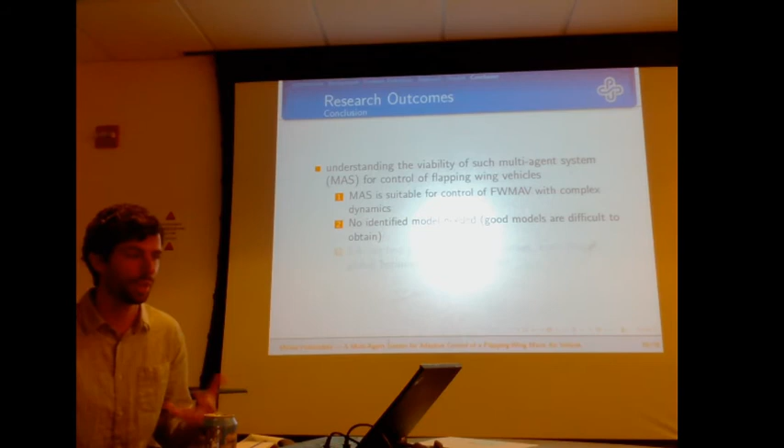We need more precise measurements, involving complex aerodynamics and so on, so it's easier to use if you don't need a model. We used an evolutionary algorithm to find good control values without the model - we basically evolved it on the actual hardware, so we didn't need much a priori information.

Then developing a multi-agent control system allowing us to follow a trajectory. To our knowledge, a multi-agent system has not been used for control of a flapping wing robot before. The important part is this system can be used on other flapping wing robots.

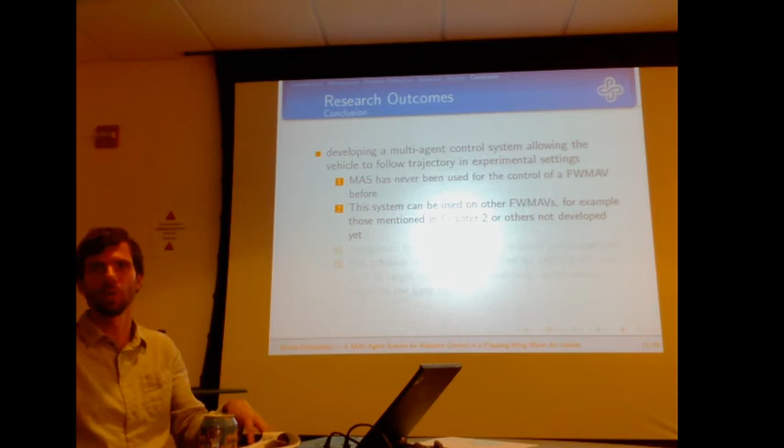It can be easily extended, as you asked before, basically for full 6 degrees of freedom, except in this case I would have more rules because I would have to maintain altitude and heading, and that would get more complex, but the basic principle would be the same. This system could also be extended to different kinds of robots, not only flapping wings but walking robots, which would be a natural extension because there you also benefit from not having a model and using the evolution algorithm to find good motion for the given movements.

Because the code is publicly available, other people can use it and get a jump start on their projects. We will use it in my class definitely next quarter.

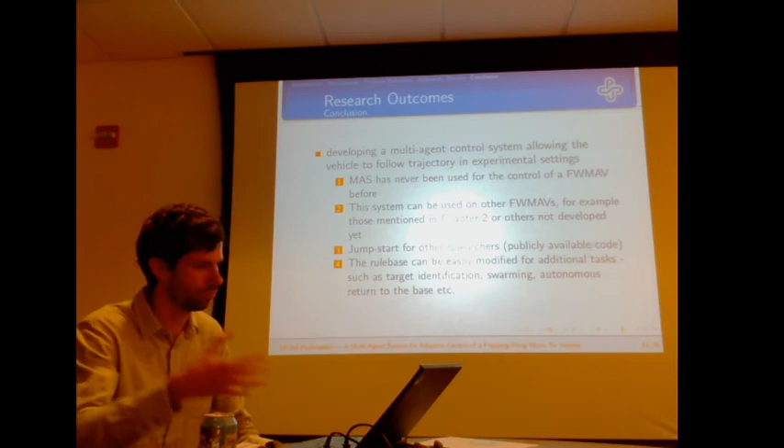As I said, we can adapt the rule base to add more. The subsumption architecture can be extended again to do even more tasks than simple control and trajectory following. We can have another layer for target identification. Swarming would be another interesting approach, as well as autonomous return to base.

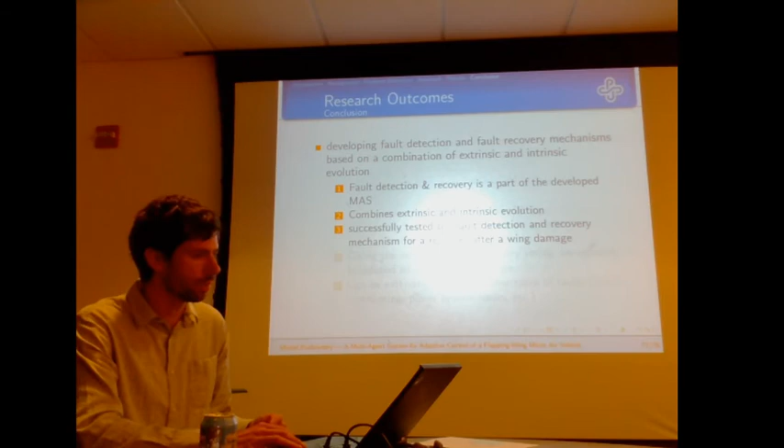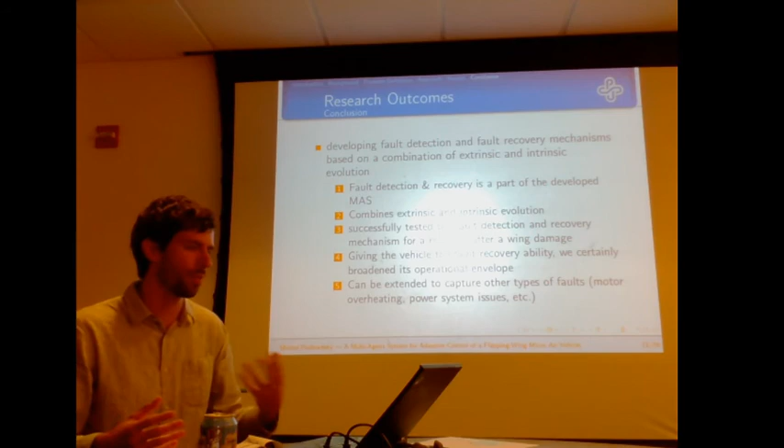Developing fault detection and fault recovery mechanisms is part of the system, as I demonstrated. We tested it with wing damage fault. It can be extended to other faults too, given the hardware improves too, because right now we don't have any redundancy systems built in or additional sensors, which would be a prerequisite for something like a power system failure or other types of fault.

Again, the overarching goal: we developed a robot that can follow a trajectory, which is part of our autonomous requirements. We have fault recovery procedures, and on top of that we have an obstacle avoidance feature. Parts of the robot are 3D printed, so that's fairly easy to produce on a broader scale, and it's all available online.

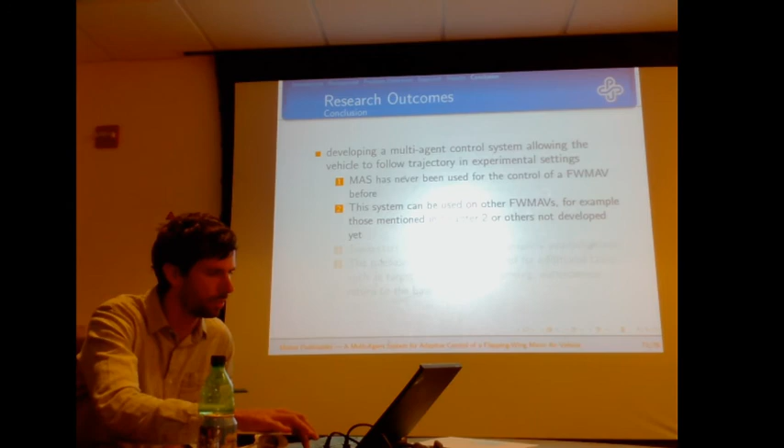So basically, turning left and right, not the wings. If I'm turning left, I commanded the robot to just turn left and do nothing else, and the same if I was turning right. So the subsumption architecture layers were not doing anything else, it was fixed to a specific behavior.

So you mentioned this is the first application of using multi-agent systems for micro flapping wing vehicles. But using evolutionary algorithms is kind of orthogonal to the multi-agent system. Is there other work about applying evolutionary algorithms for micro flapping wing vehicles?

There is definitely work like evolvable hardware, but that's kind of a separate thing. The other lab involved in this project was more interested in evolving the actual motor controller - not saying where to go, but actually controlling the waveform of the wings and recovering from faults in that way. I can't think off the top of my head if people used it for control of the robot, so I'd have to look into it.